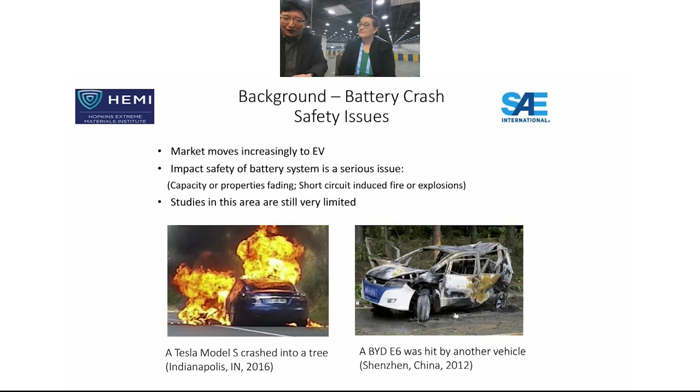So our work is mainly to better understand the vehicle battery system damage behavior and the crash loading conditions at multiple levels, from battery cell to the entire electric vehicle. We try to develop a high fidelity numerical model to simulate the crash accidents, and then develop better safety countermeasures for the battery module on the electric vehicle.

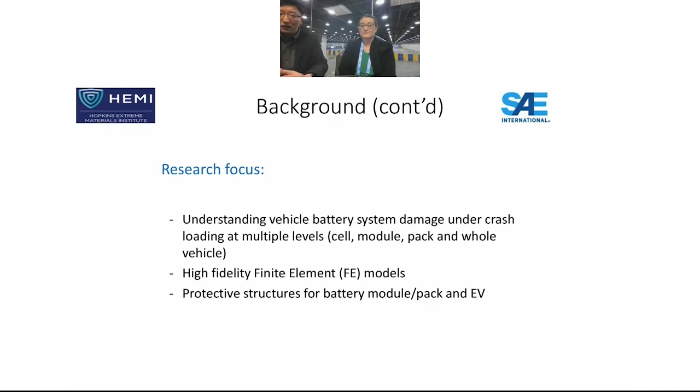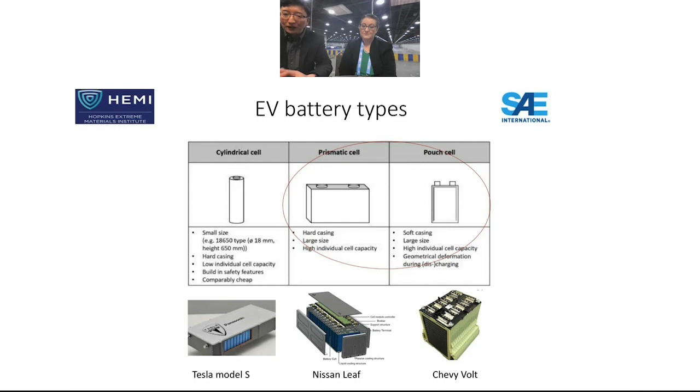Okay, so here we can see some typical battery cells currently used on electric vehicles, including the cylindrical cells, the prismatic cell with a hard casing structure, and the pouch cell with a soft casing. Our work mainly focuses on the second and third type because they are more widely used on current electric vehicles.

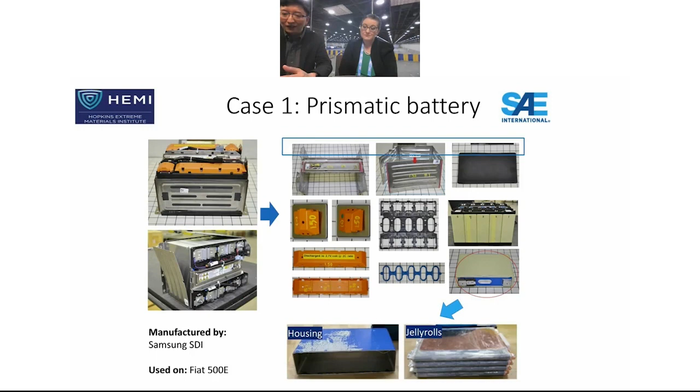This is a typical example, a prismatic battery system. On the left-hand side, the picture shows the battery module. If we decompose the module, we can see the major components on the right-hand side. 5 or 6 prismatic cells are connected to one another. The enclosure is made from aluminum. If we open the enclosure, we can see 4 layers of jelly roll stacked at the corner. So this is the configuration of the battery system.

Okay, so we did a physical test and numerical simulation. In the following order, we started with the component level, jelly roll components like cathode, anode, and separator. Then we moved on to the entire jelly roll layer, and then the entire battery cell and battery module, from smaller things to bigger things.

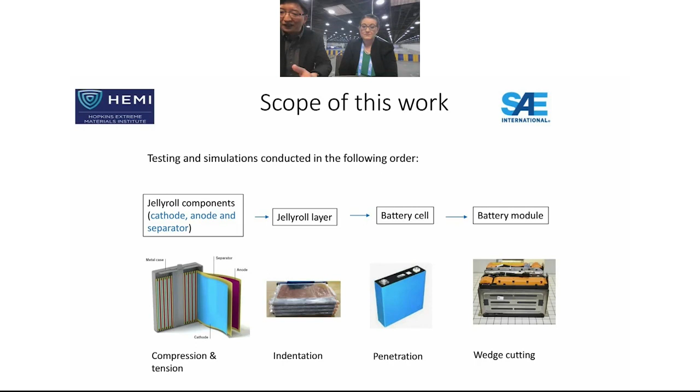At the component level, we did the standard material coupon test, like tension and compression, on each individual component of the jelly roll: anode, cathode, separator, and enclosure. Then we developed a numerical model to simulate this test and calibrate the material laws in the numerical model.

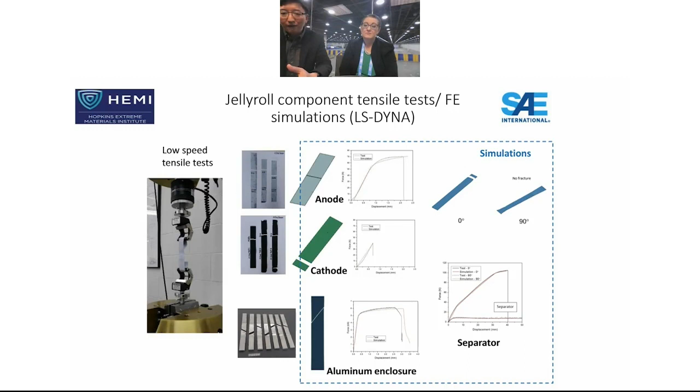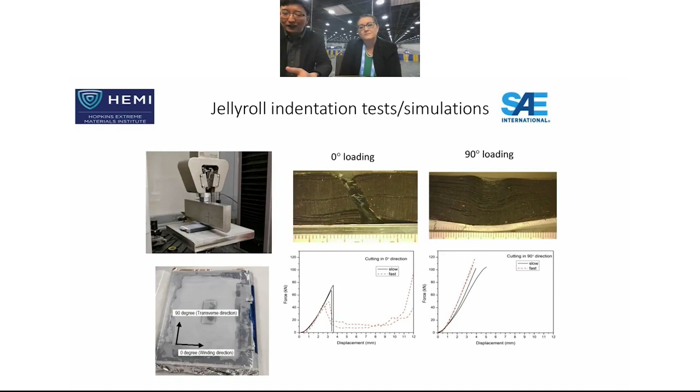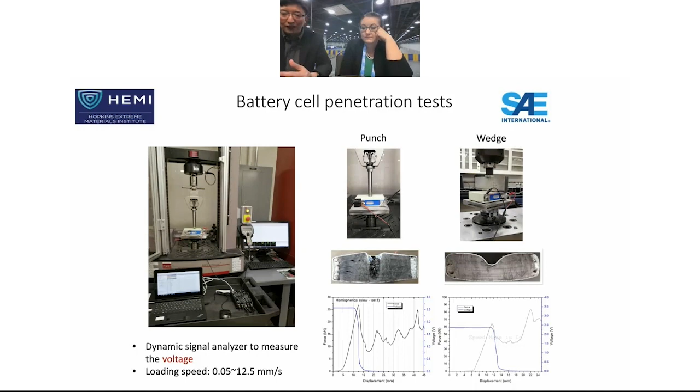Next page. That's a good thing. Okay, that's a bad thing, that's a bad thing.

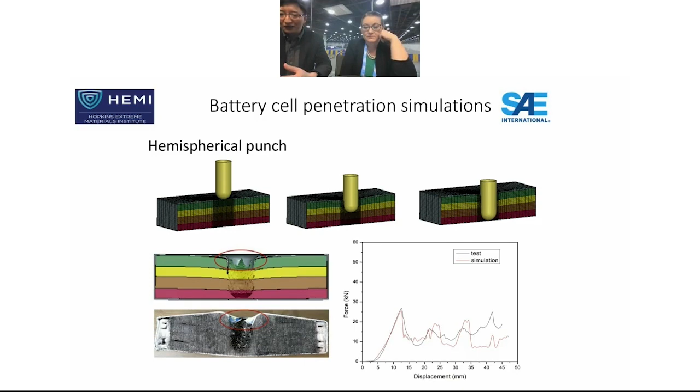Totally, it's a complete failure. We developed the numerical model to simulate this test. Here we can see the simulation of hemispherical punch loading, and we see a good agreement between the test and the simulation.

Next page. This is the simulation of the wedge cutting test on the jelly roll material only, and on the right-hand side is the entire battery cell with enclosure. Again, we can see a reasonable agreement.

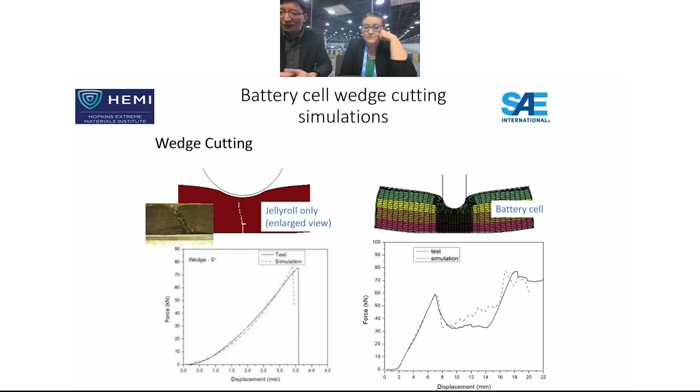Next page. This is the impact test on the jelly roll material and the battery cell. This condition is closer to the actual crush condition, so we use the drop tower to run the test. We can see the battery cell inside the test chamber. The impact velocity was up to 7.5 meters per second. Again, we measure the voltage in addition to the force during the test.

So the picture shows the impact test on the jelly roll material and the battery cell.

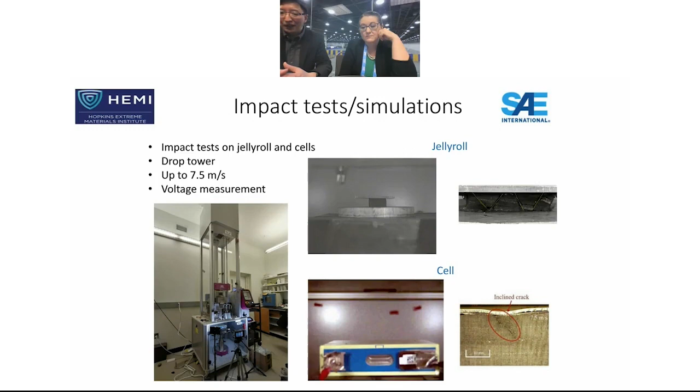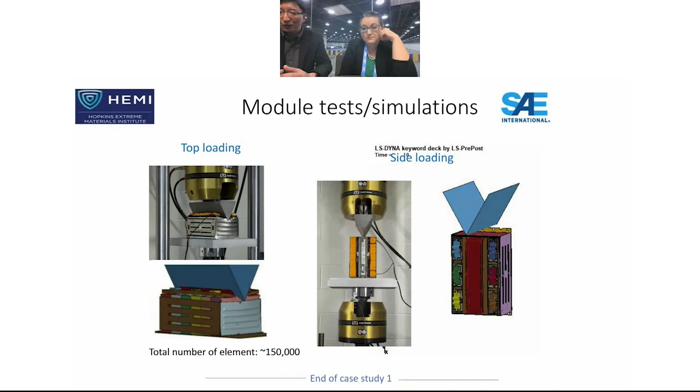Next page. Okay, this is the module level. We use this big steel wedge to cut the entire battery module in different directions, and then use a numerical model to simulate this test. Here we can see the top loading condition and the side loading condition.

Next page. All right, so that's the first case study, prismatic battery. This is the second case study.

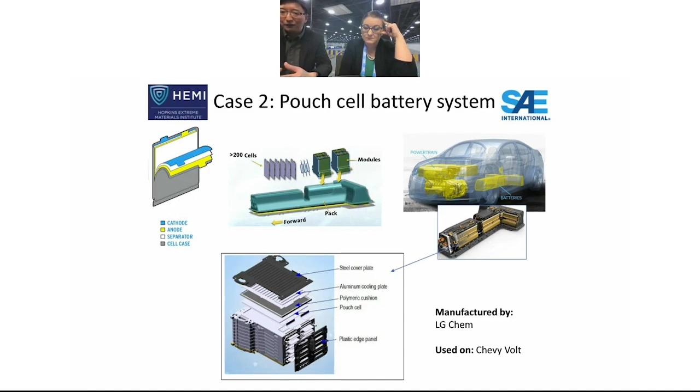It's a pouch cell without a hard casing structure. The picture shows the configuration of the battery module. On the top, we can see a cover plate, which is a very strong structure. The next step, we are going to optimize this structure using some data-driven method. Then there's the cooling plate, cushion, and the pouch cell. So this is the configuration of this particular battery system.

Next page. All right, we did a similar study on this battery from the component level to the module level. Here I directly jump to the module level.

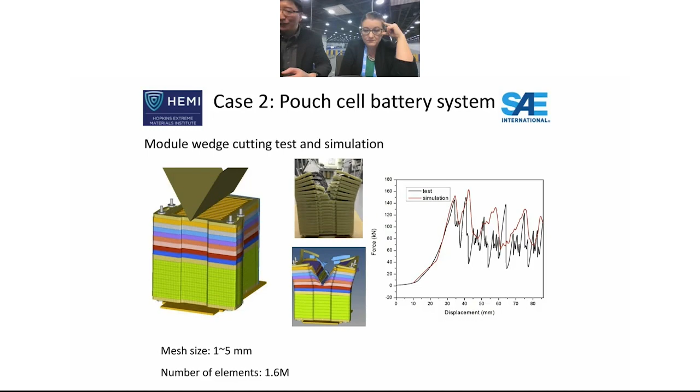Here we can see the testing and simulation of the wedge cutting. We use the same wedge to cut the battery module, so we can see the failure mode.

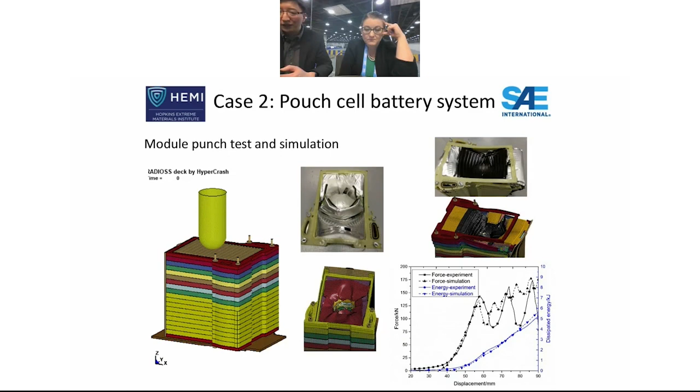Next page. Okay, so after the testing and modeling work, we expanded this study to design how to better design the battery module structure and make it safer.

Our test results show that the cover plate, as just mentioned earlier, has a significant protective effect without any fracture even under the wedge cutting. So our design improvement was focused on this structure.

The original design of this cover plate is a monolithic corrugated plate. In the new design, it was modified to a sandwich plate with multiple layers, but with the same mass, in order to increase the peak force and displacement at the beginning of the short circuit.

Here on the left-hand side we can see the original design of the cover plate. On the right-hand side is the new design, 3 layers with 2 face sheets and a lattice core in between. Lattice material, we know, is a very good energy absorber. The new design has the same weight as the old design for comparison purposes.

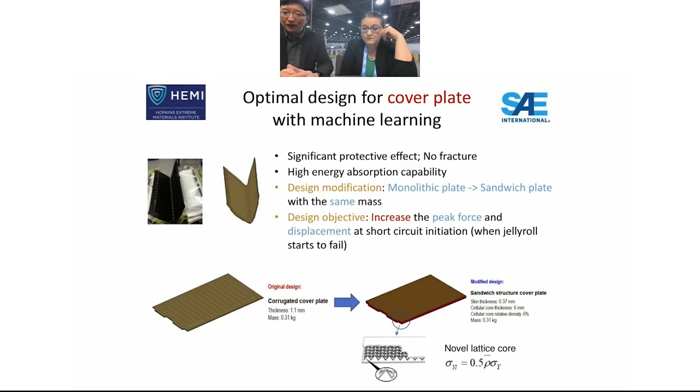Next page. All right, so here we want to use a machine learning algorithm to optimize this new sandwich cover plate to improve its crashworthiness performance.

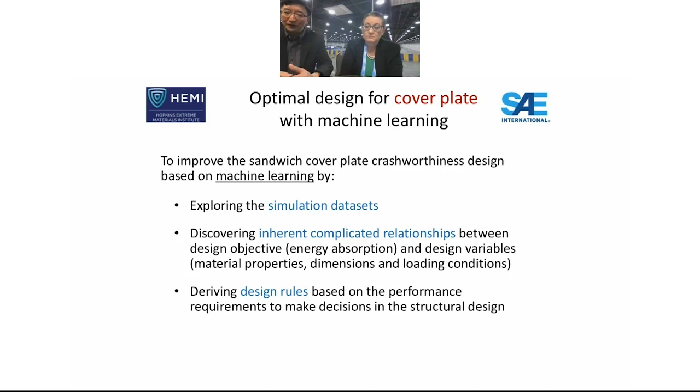Basically, we need to do 3 things. Number 1, we want to mine the simulation data set, then discover some hidden complicated relationship between the design objective and the design variables. Then we want to derive some decision-making rules to quickly generate a new design case with desired performance.

Next page. The design process has 3 main steps. First step, key parameters determination; then data set generation; and then the last step is application of machine learning for the optimal design.

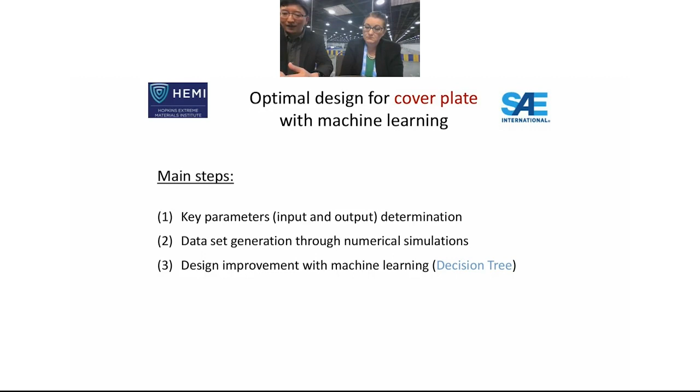Next page. Okay, now I would like to show you a very simple example to demonstrate how this method works. We start with the first step, key parameters determination.

We assume that the battery module is loaded by a cylinder from the top, and 4 input parameters or design variables are selected, including the face sheet thickness, core density, diameter of indenter, and impact velocity. The output parameter or response is energy absorption. We want to increase the energy absorption.

It should be noted that this selection is totally arbitrary. It can be changed based on specific design objectives or designer preferences. Based on the values of these input or design variables, we can generate a total of 54 combinations.

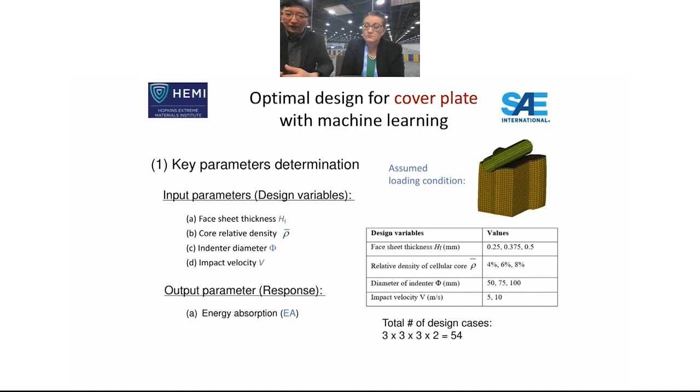Next page. All right, so each combination here is called a DOE, design of experiment. Then we run the numerical simulation for each individual DOE and calculate the energy absorption.

And the simulation data set, we form simulation results into a data set like this table for the subsequent machine learning model training. So this is the second step, data set generation.

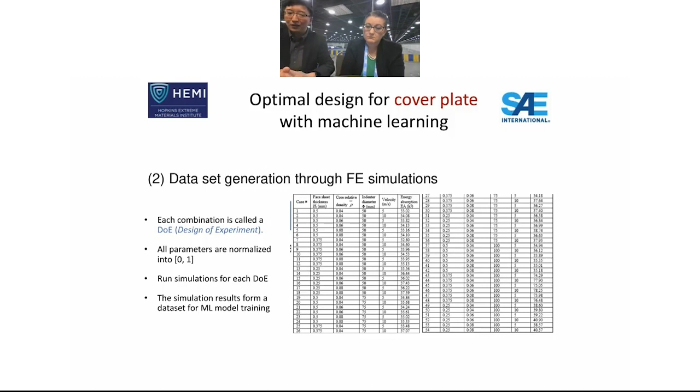Next page. So the third step is applying machine learning. Here we use an algorithm called a decision tree. Decision tree is a tree-like graph to link the input and output parameters. A typical decision tree has a root node on the top, several leaf nodes at the bottom, and a few internal nodes in between.

The root node and the internal nodes represent design variables or input. The leaf nodes are labels of performance, design performance, or output. And the path from the root node to one of the leaf nodes is a decision-making rule to link the input and output.

Here we can see a very simple but widely used example to show the principle of this method. It's regarding credit card application decisions by a bank. We know that every bank has a big data set of existing customers. They use this big data set to train the machine learning model, like a decision tree, and make a quick prediction for new applicants or new customers.

For example, this is a typical but highly simplified decision tree. We can see the root node and internal nodes are input, and the leaf nodes are output or label of performance. So given the information of a new applicant, we check the top, the root node, first.

So the root node is salary. If the salary is lower than 100K, then we go to the left. Check the second node: if profession is teacher, then we go to the left. Good credit, that means approval. Otherwise, we go to the right: bad credit, meaning the application will be denied.

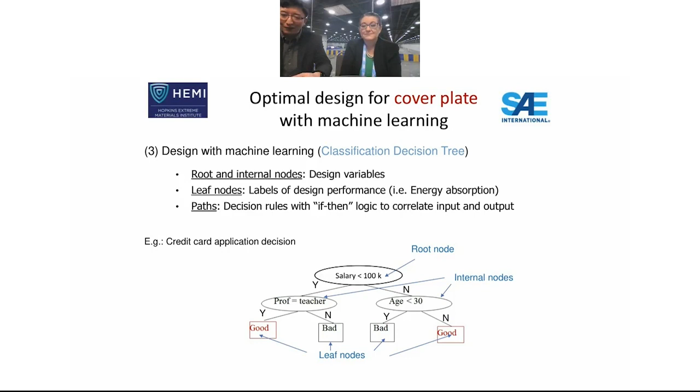So we can see that using this kind of decision tree, based on the knowledge of existing customers, we can make a quick decision for the new customer, right? We can use the same idea to design the structure. I'll show you how. Next page.

This is theory, I'll skip this part. Next page. All right, so we want to use a decision tree to quickly design a cover plate for the battery module.

The first thing we need to do is classify or label the design performance. So in our data set, we assume that the one-third highest energy absorption value cases are labeled as good designs, or G, and one-third of lowest energy absorption value cases are labeled as poor designs, or P, and the others in the middle are labeled as intermediate designs, or M.

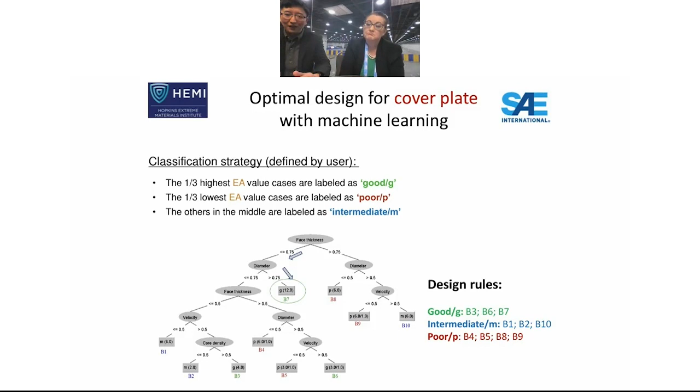Next page. All right, the typical good design, typical poor design predicted by the decision tree. Next page. All right, this is a brief summary of this work. So we developed a simple solution to achieve the rapid design of the protective structure and some other goals.

There are many machine learning models available. However, they are not able to achieve all the above goals at the same time. And this decision tree method can be applied to many different systems with multiple parameters. I can show you some other examples. Time now, thank you.

Oh, that's very interesting. Yeah, let me get back to my questions. So when you're looking at these AI or machine learning algorithms, and you said that there's potential for AI...

Do you have methods in injury analysis that you would like to talk about a little bit? Okay, yeah, I'm happy to show you another example. That's an application of this method in biomechanics.

Yeah, so can you show the others? Should go on to the next one. Nope, I don't know if we have the other one.

I guess maybe we can talk about it. So in the same way that you're using a decision tree here, you're kind of incorporating more physics aspects, like a more finite element analysis of the body. And then, in the similar vein that you use a decision tree here for the structural analysis, what did you do to incorporate the biomechanics and the physical elements?

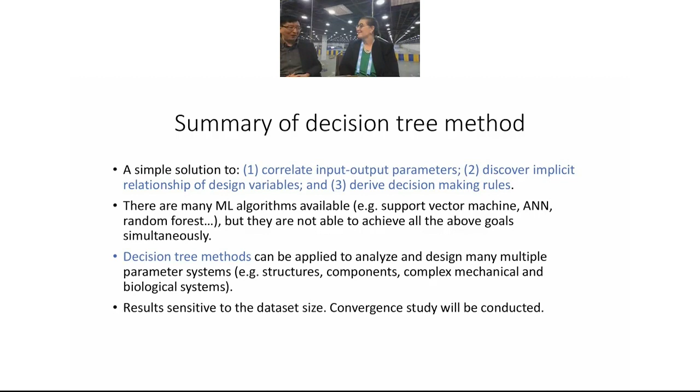Well, that's great. Thank you so much for sharing.